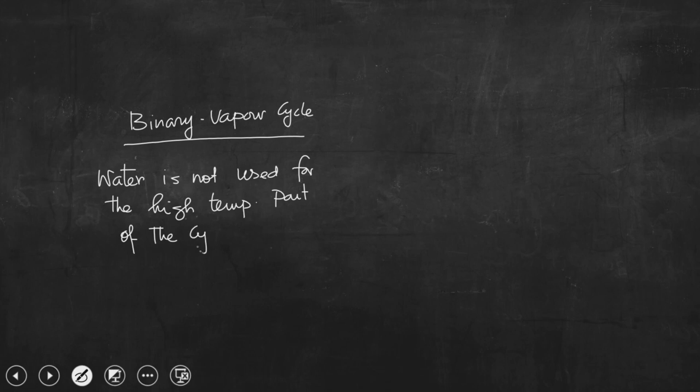Briefly, water is not used for the high temperature part of the cycle. It is replaced by more suitable fluids like mercury, sodium, potassium, etc. This means we cannot reject water completely as the working substance in the steam power cycle; rather, we cannot use water for the high temperature part of the cycle. What we can do is replace it, as you have seen in the last class.

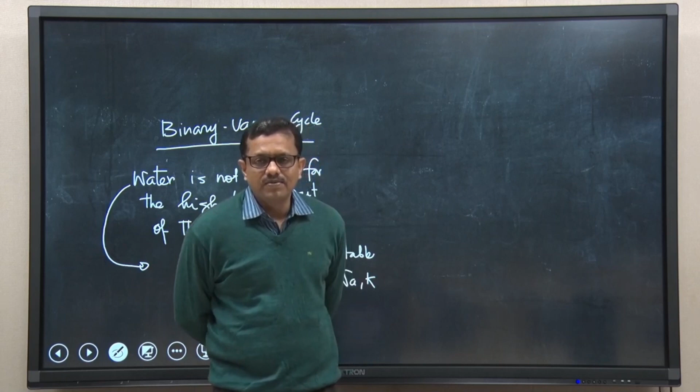The idea is that water will be used again in the low temperature part of the cycle, but for the high temperature part we use either mercury, sodium, or potassium. As discussed, properties like high critical temperature, low triple point temperature, high enthalpy of vaporization, and high heat transfer characteristics - water does not have all these at the high temperature part of the cycle, but the same working substance can be used at the low temperature part. That means different fluids have different attractive features, but not all of them.

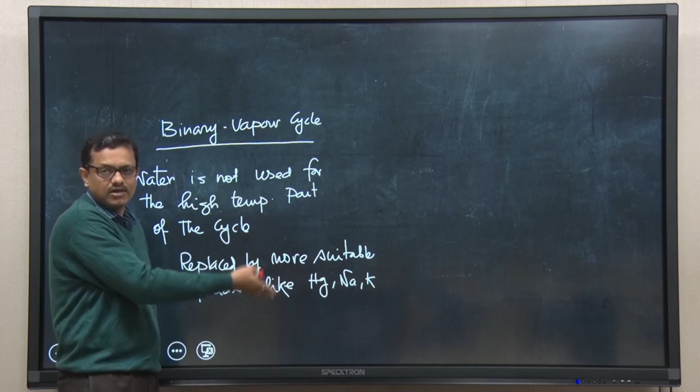Our objective should be to use both fluids, because though these two different fluids have different attractive features, not all of them possess everything. In the high temperature part of the cycle, mercury will have a few attractive features that water will not have. Similarly, at the low temperature part of the cycle, water will have a few attractive features that mercury may not have.

So it is because of this reason that two different vapor cycles operating on two working fluids are combined together, and this concept is called the binary vapor cycle. So the idea is to use a binary vapor cycle.

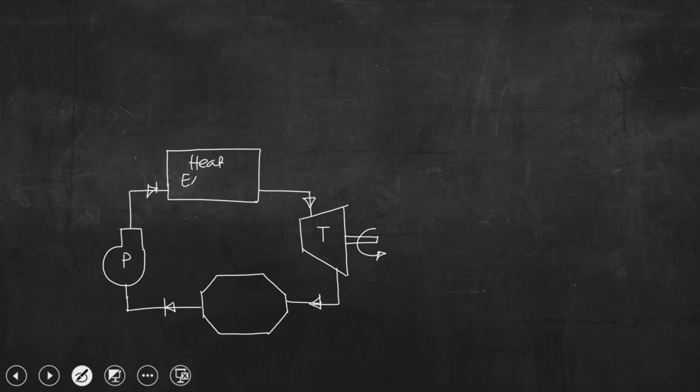If we go to the next slide, let us try to draw the schematic depiction. This is the pump, this is a heat exchanger, this is the turbine, and this is the condenser. Now, you can see, this is the steam water cycle.

So, this is the low temperature part of the cycle, because we are using water as the working substance, as per our previous discussion. And similarly, this is the high temperature part of the cycle.

So, this is the turbine, and this is connected to the electric motor. Mercury turbine connected to motor, so we are giving the name mercury electric motor. The shaft of this turbine is also connected to the shaft of an alternator, and that is the steam alternator, we can give the name.

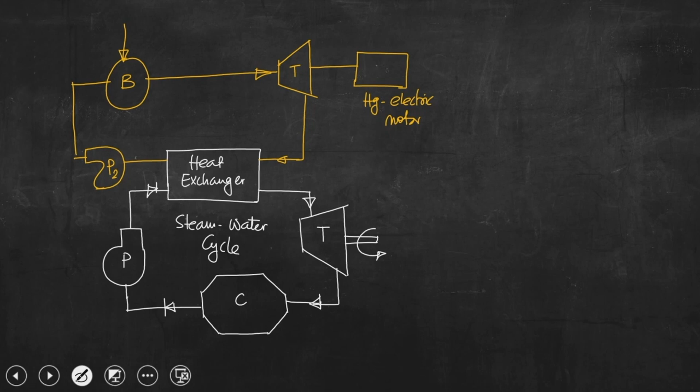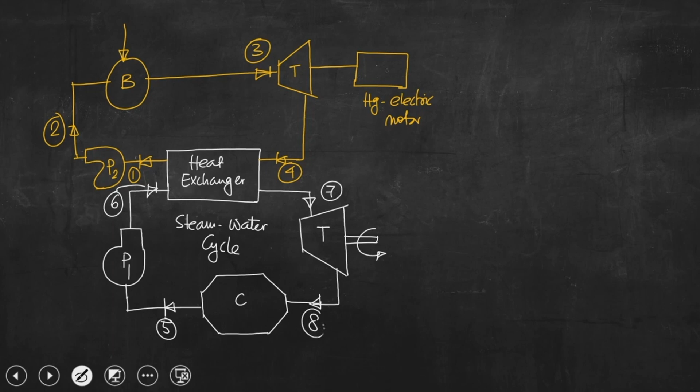Okay, now that is again pumped back to the boiler, which upon receiving heat, so this is the turbine. So, this is 1, this is 2, this is 3, this is 4. We can give the name. Similarly, this is 5, this is pump 1, this point is 6, this is 7, and this is 8. So, this is basically the Hg cycle.

So, you know that this is the binary vapor cycle. The idea was to use both fluids. We are enjoying the attractive features of mercury, which are usable at high temperature. Also, we are exploiting the attractive feature of water at the low temperature part of the cycle. So, this is the high temperature part, and this is the low temperature part.

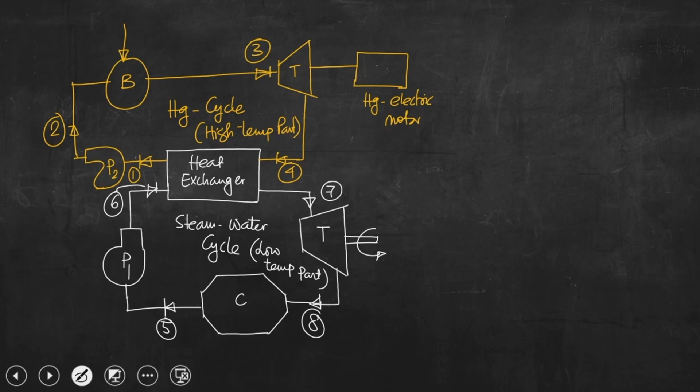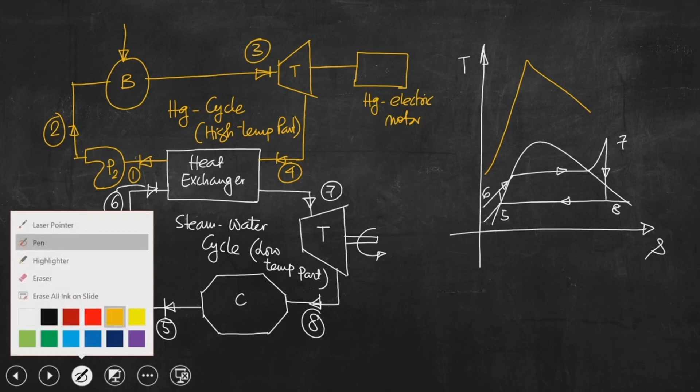Okay, so if we try to draw the TS diagram, so this is 5 to 6, this is 5, this is 6, this is 7, this is 8. And if we try to draw the TS diagram for the high temperature part of the cycle. So, this is the case. Now, this is 1 to 2, the pumping process. So, this is 1, this is 2, this is 3, and this is 4.

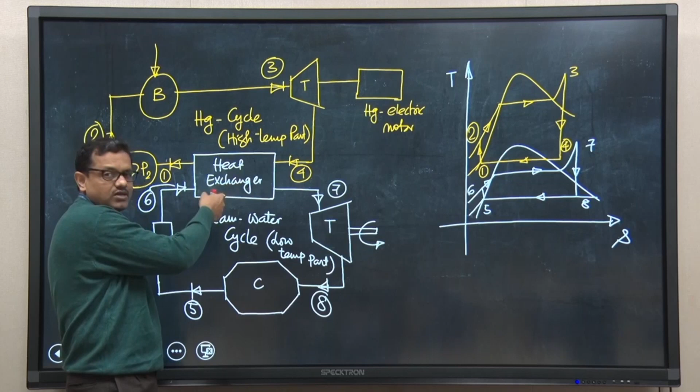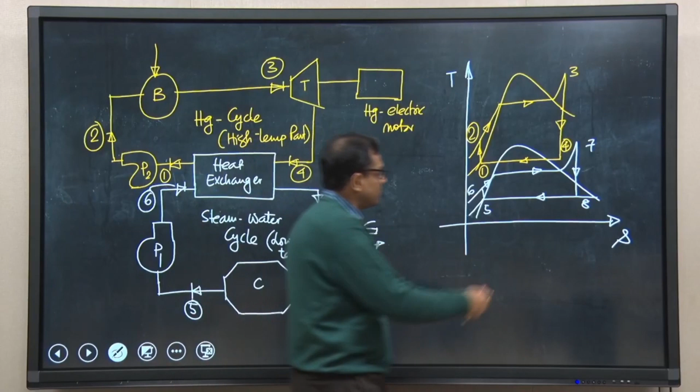So, the heat lost by mercury is equal to the heat gained by the water, and that is how water is converted into steam, and finally it is allowed to expand isentropically in the turbine, and we are getting output. So, the design should be such that the steam coming at the exit of this heat exchanger is superheated, otherwise the problem of turbine blade erosion will occur, which we have discussed extensively when discussing other cycles.

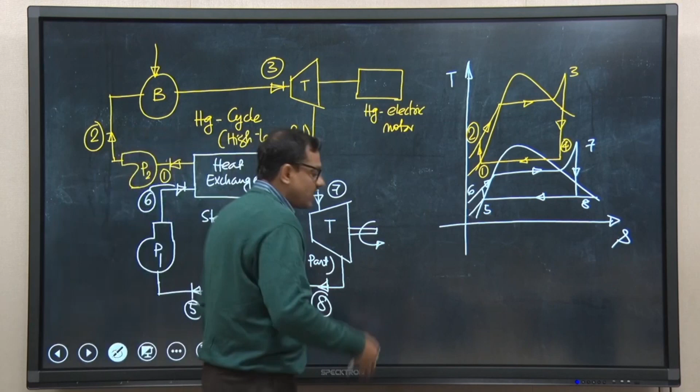So, now let's go for the discussion, and our objective in this class should be to analyze, essentially to calculate the thermal efficiency. So, if we consider that m kg of mercury is circulated per kg of steam generation, this is what we are assuming.

We are assuming that the mercury which is circulated, the mercury which is pumped by pump P2 to the boiler, this is Q in, and finally this is Q out. Virtually there is no heat rejection in the Hg cycle, but there is heat rejection, and that rejected heat is gained by the water. So effectively, there is a high temperature part of the reservoir wherein heat is added, and a low temperature part of the reservoir wherein heat is rejected.

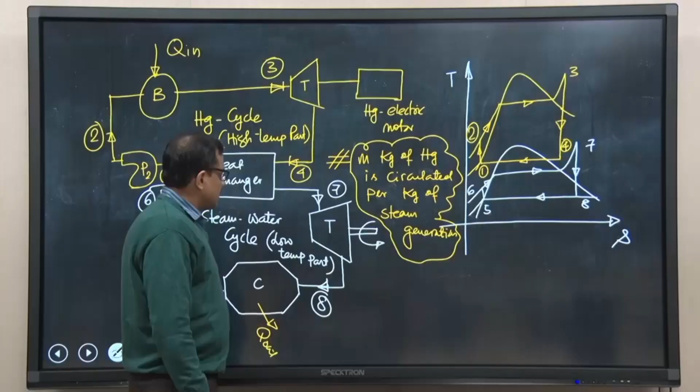So, if we consider the mass of mercury circulated in this cycle is m, that m kg of mercury is circulated, because mercury would be converted to mercury vapor in the boiler, and then it will go into the turbine for its expansion. And if we consider that per kg of steam we need to supply or circulate m kg of mercury, that is what we have assumed.

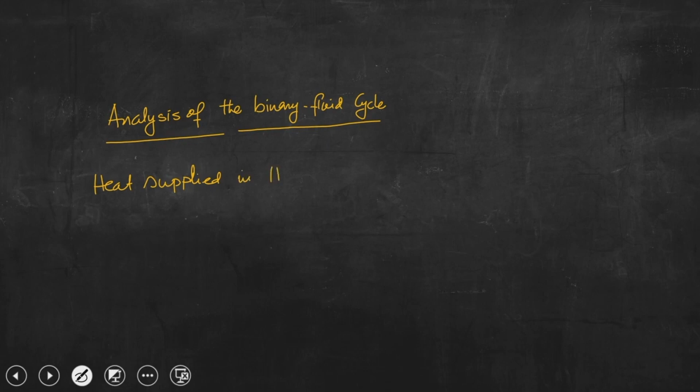Okay, so now let's go for the analysis, the analysis of the binary fluid cycle. So, the heat supplied in the Hg boiler, we are using this prefix Hg to indicate that the boiler is associated with the Hg cycle. So, this is Q in, and that is what we have seen, that this amount of heat is added to this mercury cycle, and Q in is equal to m into H-Hg-in, or I can give the name HGI.

This quantity is basically the amount of heat, this enthalpy, supplied per kg of Hg vapor formed in the boiler. So, if we assume that m kg of mercury vapor is produced in the boiler, then this is the total amount of heat, Q in.

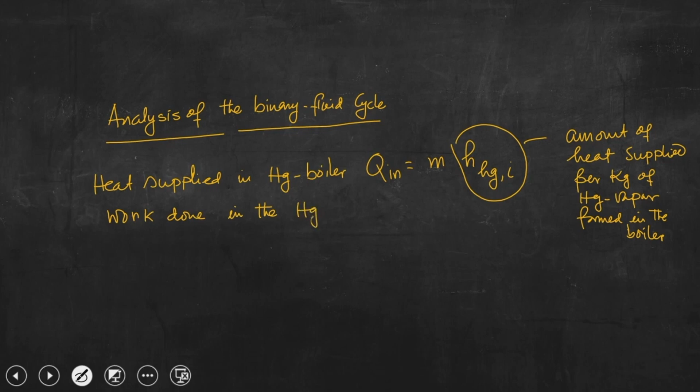And what is work done? Work done in the Hg cycle equal to Whg, equal to mass flow rate into specific work done, Whg. So, this is work done per kg of Hg in the cycle. Right, because we are assuming m kg of Hg. So, this is the total work done.

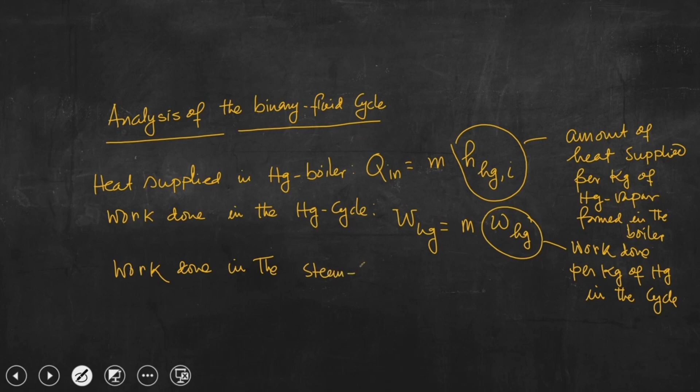Next is what is the work done in the steam cycle? I am not going to write steam water cycle or the steam cycle. So, W steam will be equal to WST into 1, because we have assumed that for 1 kg of steam generation we need to supply m kg of mercury. So, that is 1 into WST, and this WST is work done per kg of steam in the steam cycle.

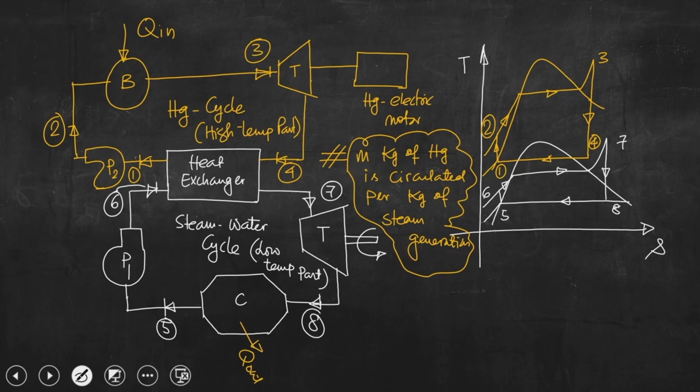So, if we write what is the total work done, let's go back to the previous slide. We are getting work output from the mercury turbine, we are also getting work output from the steam turbine. So, this total work output we need to calculate first, and this total work output we are getting at the cost of this heat input Q in.

So, from there we can calculate the overall efficiency or total efficiency of the cycle. So, we can write total work output equal to W total equal to m into Whg plus Wst.

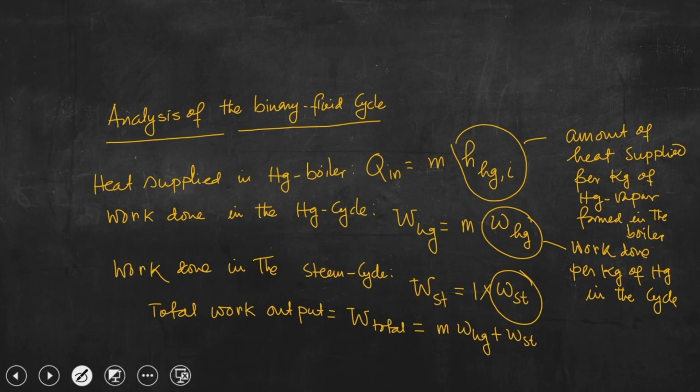So, overall efficiency of the binary cycle, that is eta overall, equal to W total by Q in. So, we can write this is m into... this is because Q in, that is the expression. So, this is the work done for the binary cycle, overall efficiency of the binary cycle.

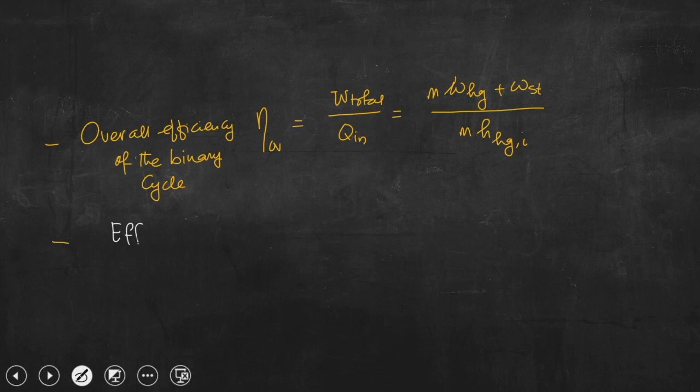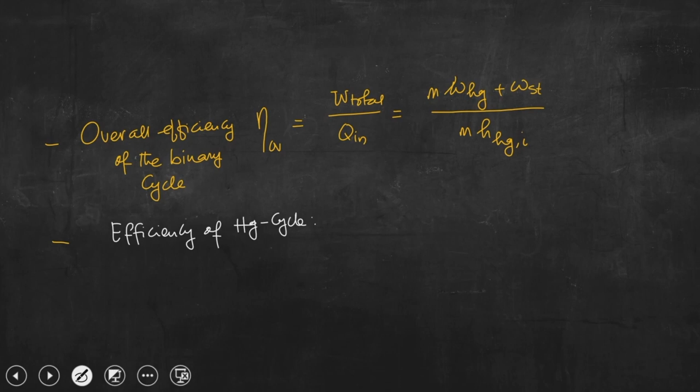We also can calculate efficiency of the mercury cycle. What is that? Eta mercury, because H small g is used to denote that it is mercury. So, what is eta Hg? We are supplying this amount of energy which is added to the cycle, and at the cost of that energy we are getting only this much amount of work, WHG. So, this is the expression.

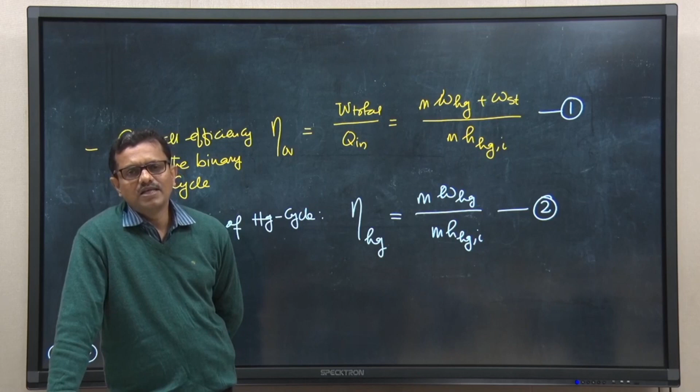So, if we give this equation is 1, this equation is 2. So, we have calculated efficiency of the mercury cycle. Next objective should be, since we are discussing the analysis of the binary fluid cycle, till now we have calculated the overall efficiency as well as the efficiency of the Hg cycle, that is the top cycle, topping cycle.

So, let me go back to the previous slide. This cycle is also known as topping cycle, and this is known as bottoming cycle. So, our next objective should be to look at the processes of the bottoming cycle, and from there we should try to calculate the efficiency or thermal efficiency of this cycle.

So, if we go to the next slide, then that is efficiency of steam cycle. Try to understand, if you would like to calculate efficiency of the steam cycle, we know that what is the work output, right, that is WST, because 1 kg of steam should be generated. So, what is the input energy for that work output?

So, that input energy is coming because in this case there is no heat source which is supplied externally, rather the temperature of the Hg vapor after doing certain amount of work in the Hg turbine, when it is taken through this heat exchanger, you can understand this is just like counter flow heat exchanger. So two streams are flowing opposite to each other, and during the course of their flow, because of this heat exchange, the water which is circulated or pumped to the heat exchanger will be heated up, and it is designed such that at the exit of the heat exchanger it should be superheated steam. So the idea is this heat exchanger is also known as Hg condenser and steam boiler.

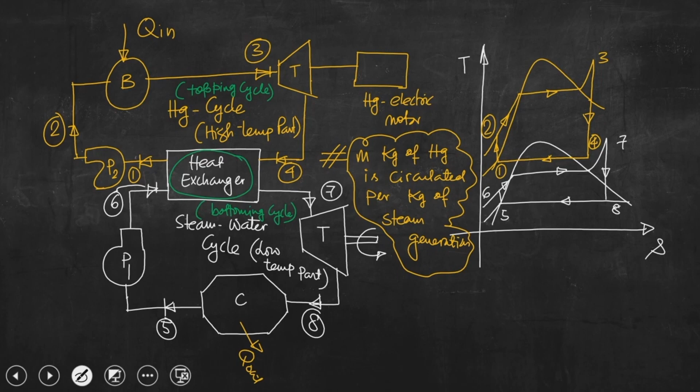So if we write that: heat lost by mercury vapor is equal to heat gain by water. If we do like this, then we can write m kg, and we do not know the enthalpy of water, the enthalpy of HG vapor after doing a certain amount of work. So this is H HG out equal to H ST, because this is 1. From there we can say m is equal to H ST divided by H HG out.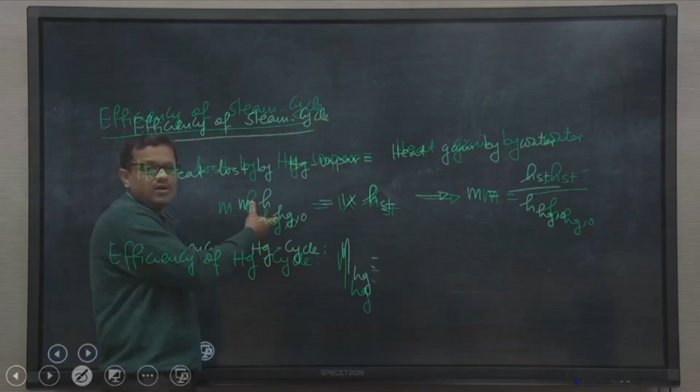So this is the expression. Now the efficiency of the mercury cycle, what we had written, that is eta Hg equal to... knowing that this is the loss of energy by the mercury during the cycle, and that energy should be gained by the water. So can't we write the expression of efficiency from the perspective of energy balance?

So we know that this is the amount of energy in minus out, divided by m Hg,i. So basically this is the amount of energy added to the Hg cycle, but out of this energy we are going to reject some amount of energy to the water. So this is the net energy that is used to get the work, and that is how we get the work output from the mercury turbine. So this is also the expression.

So we can write it. See what is this expression? If we look at this equation, m into Hgo is equal to Hst. Why are we doing this? We can write this equal to m into Hgi minus Hst, divided by m into Hgi. Why are we doing this?

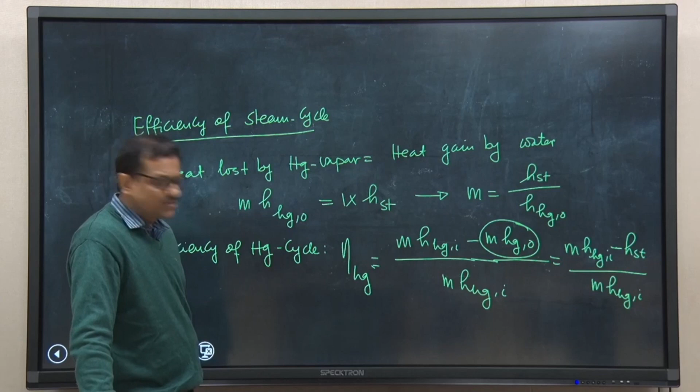Because we are going to calculate the thermal efficiency of the steam cycle soon. For that we need to relate this Hst, because that is the amount of energy added to the steam water cycle per kg of steam generation. So if we go one step further, we can write this equal to 1 minus 1 upon m, Hst divided by Hgi. So this is equation number 3.

If we now use the expression of m, this is equation 3a and this is 3b. So if we use the expression of m from equation 3a and plug it in here, then we can write eta Hg equal to 1 minus...

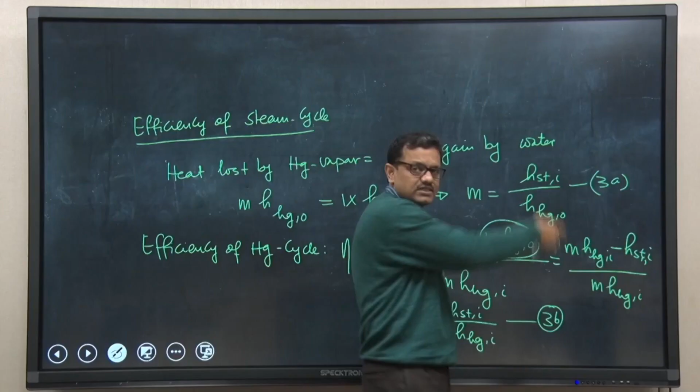What is m? M is Hst by Hgo. So I can say this is Hsti, because that is the inlet value. This is the enthalpy of steam at the inlet to the cycle, right, inlet to the cycle. So basically this Hgo, the enthalpy of mercury out, is equal to the enthalpy of steam at the inlet to the cycle, that is Hsti.

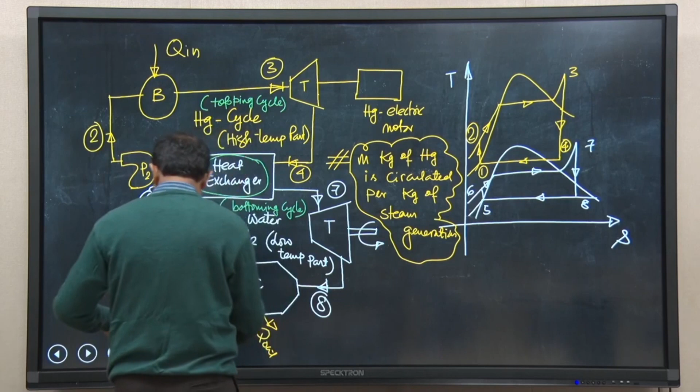That is why I'm using this nomenclature, Sti. So if we plug in the value, we can write this as Hsti by Hgi times Hgi by Hgo. We can go one step further and write this as 1 minus Hgo divided by Hgi. So this is the efficiency of the mercury cycle in terms of the enthalpy that we considered. From there we can write the thermal efficiency of the steam cycle.

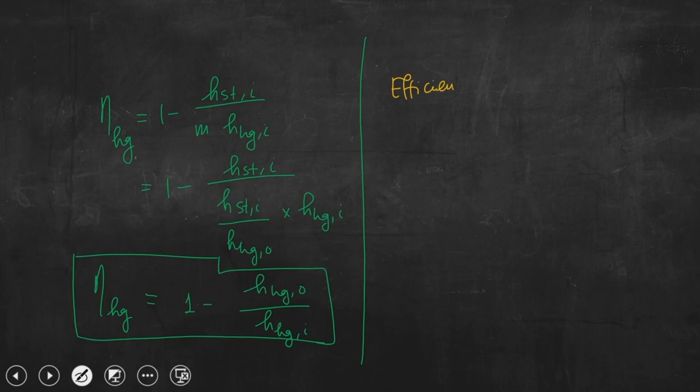Efficiency of the steam cycle, eta St, equal to... what is this? Try to understand. This is Hsti, so per kg of steam this is the input energy to the cycle, and at the cost of that we are getting work output, that is Wst. So this is the efficiency that you can understand very easily: work output by heat input, energy output by energy input.

So this is the amount of energy added to the steam cycle per kg of steam, and we are getting total work output, that is 1 into Wst. So we can write Wst divided by Hsti. What is Hsti? Try to understand.

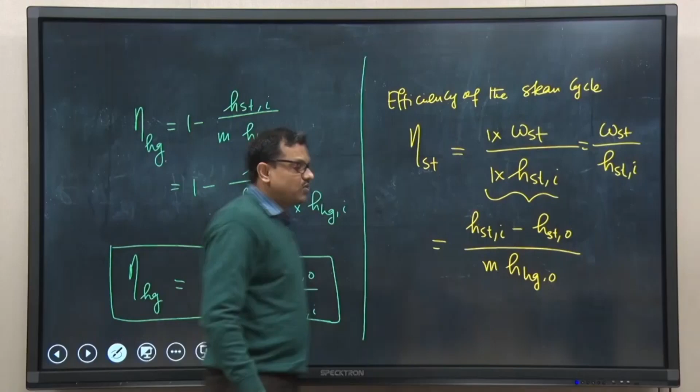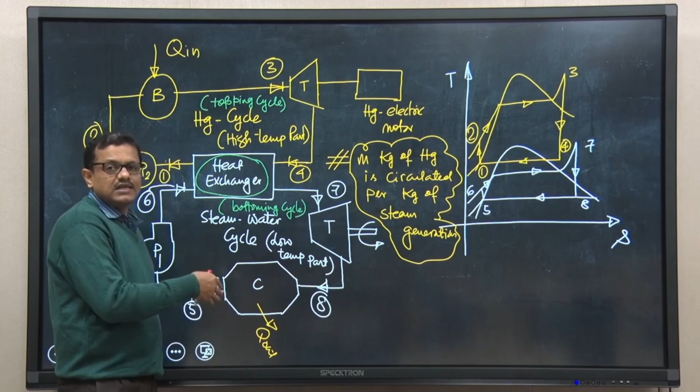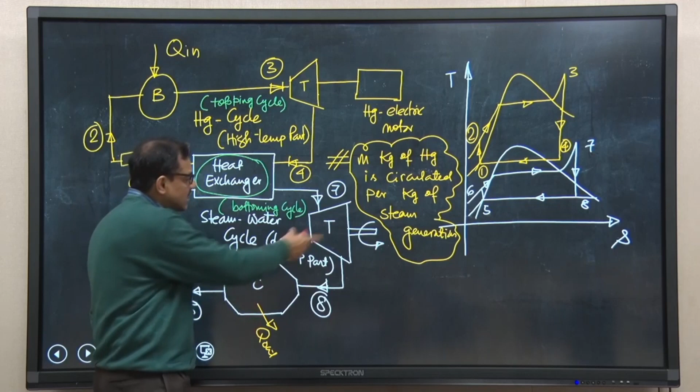HSTI equals m into HHGO. So we are trying to express this as m into HHGO, and then HSTI minus HSTO, because if we look at the steam cycle, HSTI is the enthalpy per kg of steam entering the cycle, but there is heat rejection. So per kg of steam, the amount of heat that must be rejected from the cycle, because we need to run it in a cyclic manner. So Q out is nothing but HSTO per kg of steam, and enthalpy in minus enthalpy out gives us WST.

So if we write it, this is the efficiency of the steam cycle, and this is the WST. So next, our objective should be, if you recall, we could quantify the efficiency of the binary vapor cycle, and we also established the efficiency of the mercury cycle.

Finally we have established the efficiency of the steam cycle. So our objective should be to see the contribution, what fraction of steam cycle efficiency is contributing to the total efficiency of the cycle. If you would like to do it, we need further calculation. So if we try to write the overall efficiency, we need to know the contribution coming from both the mercury cycle and the steam cycle toward the overall efficiency. Is it 60-40, 50-50, or is it 30-70?

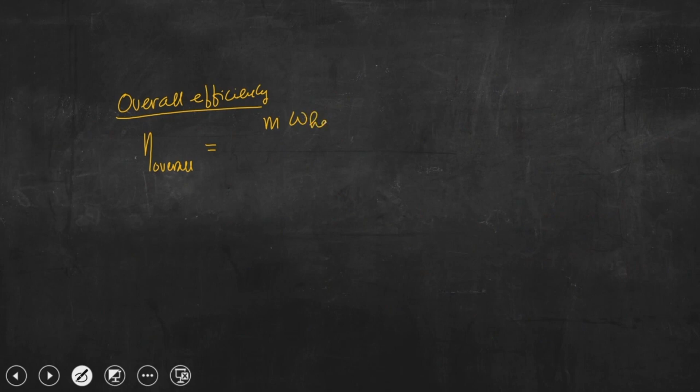So overall efficiency, eta overall, what we had written, if we go back to the previous slide, is the expression m, WHG plus WST, by this. So if we write it, that is m WHG plus WST divided by m.

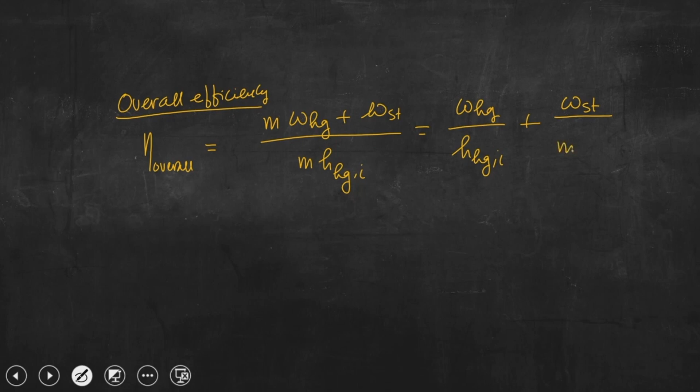That is the enthalpy of mercury at the inlet. So we can write it as WHG divided by HHG comma I, plus WST divided by m, Hg comma I. What is this? Try to understand, this is the efficiency of the mercury cycle, because this is the input energy and this is the output work. So this is basically the mercury cycle efficiency.

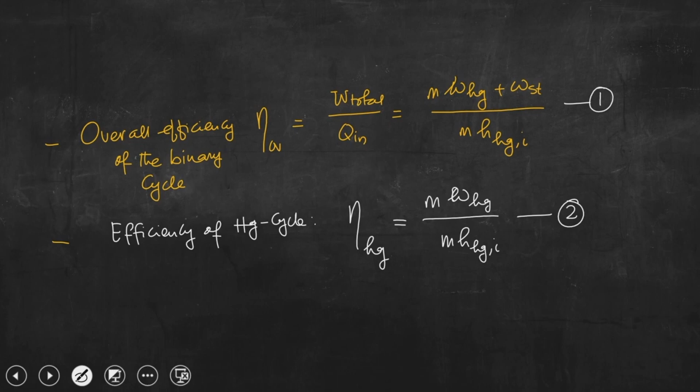So if we go back to this, you can understand that the mercury cycle efficiency is nothing but equation 2, m into WHG by m into HGI. If you cancel m from both denominator and numerator, you get WHG by HGI. So if we go to the next slide, this is eta Hg, the efficiency of the mercury cycle.

What about this term? We can try to write it as WST divided by HSTI. Okay, so HSTI we can write as into HSTI divided by m, HHGI. Why are we doing so?

Because this is the work output for the input of energy to the steam cycle, so this is the efficiency of the steam cycle, that is what we had written. Let us go back to that: this is WST by HSTI. So to give this expression in the form of steam cycle efficiency and mercury cycle efficiency, we are doing this.

What about this m? We can write that eta overall equals eta Hg plus eta St into H St comma I divided by m Hg comma I. Even though it is not in complete closed form, from here we still cannot say what the contribution from the steam cycle toward the overall efficiency would be. So it's not in closed form; rather, we need to write this expression in terms of the efficiencies of either the steam cycle or the mercury cycle.

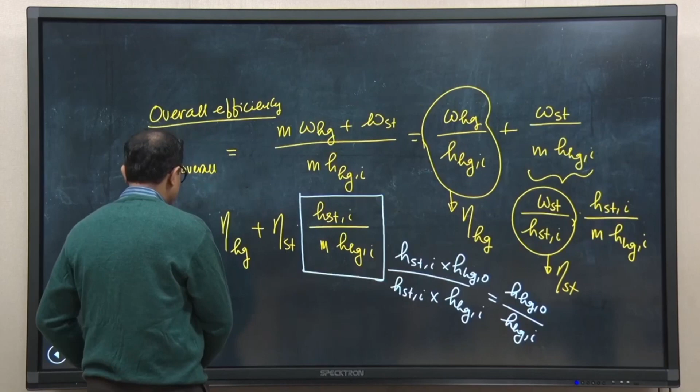Can you recall? Now we can write this expression in terms of the efficiencies, or at least in terms of efficiency. What we can see, a few minutes back we calculated this mathematical exercise, so we can see the expression of H Hgo by H Hgi is nothing but 1 minus eta Hg. So if we write it, we get eta Hg plus eta St into 1 minus eta Hg. So this is eta overall.

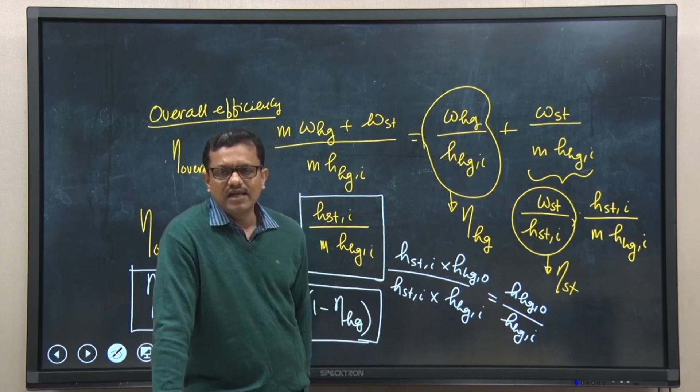So this is the final expression of the overall efficiency of the binary cycle, now in closed form. By looking at this expression, we can tell the contribution coming from both the Mercury and steam cycle towards the overall efficiency of the binary cycle. So this is basically the analysis part of this binary cycle, and it is very easy, just the things we have discussed from our basic concept.

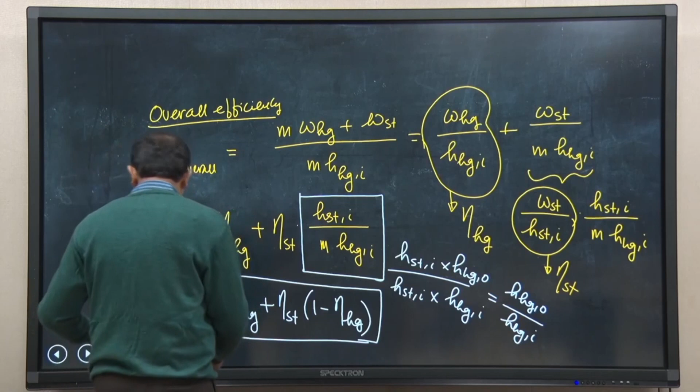So now finally, I would like to discuss about the second law analysis. So this is very important, that is second law analysis.

You have studied about the second law of thermodynamics in the context of basic thermodynamics course, but now the question is why do we need to again discuss this particular aspect in the context of the module of steam power cycle. So we have discussed starting from the Carnot cycle to ideal Rankine cycle, then Rankine cycle with different modifications, reheat Rankine cycle, regenerative Rankine cycle, and finally binary vapor cycle.

So out of these cycles, only the Carnot cycle is the reversible cycle. In the Carnot cycle, if we try to recall, all processes are two reversible isothermal processes and two reversible adiabatic processes. So already I had mentioned reversible - all processes are reversible, both internally as well as externally.

So long as the processes are reversible, whether internal or external, basically these processes are both internally and externally reversible, there is no need of studying this particular topic. So basically, second law is important, is vital to understand the degree of irreversibility present in any processes.

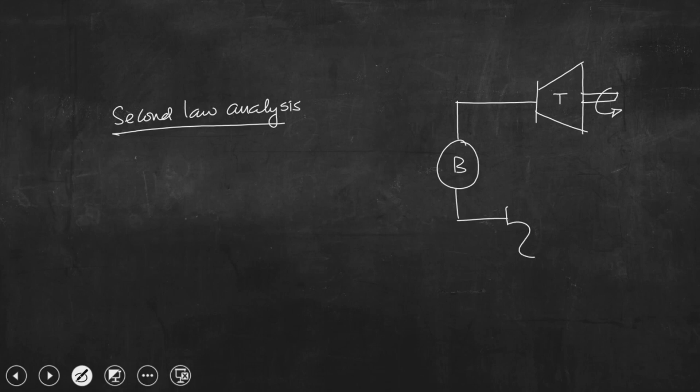So this is the boiler, this is the turbine, this is the pump, this is the condenser. So these are the basic components.

What we can see is that even if we consider the simple Rankine cycle or simple reheat cycle, reheat Rankine cycle, or even regenerative cycles - for the regenerative cycles we need additional components, even for the reheat cycle - but if we consider the simple ideal Rankine cycle, what we can see is the schematic used to describe the processes in the simple ideal Rankine cycle.

What we can see is all the processes are internally reversible, right? But what is done here: heat is added from a high temperature thermal reservoir to the boiling liquid. So addition of heat from the high temperature thermal reservoir to the boiling liquid, and finally, if we look at this component, heat is rejected from the condensing steam to the low temperature reservoir.

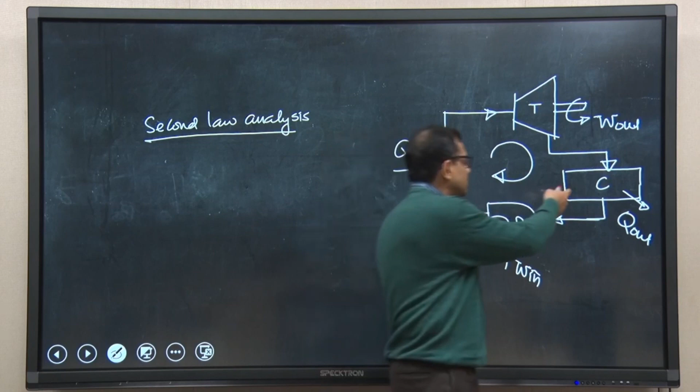It is because of this irreversibility, whether during heat addition to the boiler or during heat rejection from the condenser, some degree of irreversibility will be there, and so long as irreversibility is present in any process, it will tend to destroy the available energy. So this cycle has the potential to do some work, but that potential will be destroyed because of the irreversibilities present in these two processes. It is because of this reason we also need to study this second law analysis.

Second law analysis will give us a picture about the presence of the irreversibilities, the sources of irreversibilities, as well as it will help us measure the degree of irreversibility present in any process. Let us quickly do it.

That exergy destruction term you have studied in thermodynamics - what do we mean by that? That is resource degradation. Exergy destruction is nothing but the resource degradation.

These two processes, like heat transfer from high temperature thermal reservoir to the boiling liquid, and heat rejection from condensing steam to the low temperature thermal reservoir - these two processes will destroy the energy at which this cycle will work.

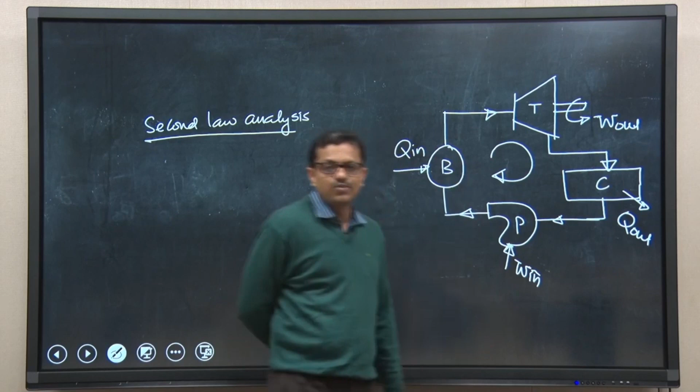If we could somehow remove these two processes, if we could ensure that heat is added to the boiler without inviting any irreversibility, and that heat must be rejected from the system to the surroundings without inviting any thermodynamic irreversibility, perhaps the efficiency of the cycle would be better compared to the case where these two processes invite irreversibility - and that is the real process.

So these two processes are not allowing the system to operate at the best exergetic efficiency. Exergetic efficiency will be destroyed only because of the irreversibility present. So this exergy destruction is the measure of the deviation of the exergetic efficiency of any particular system.

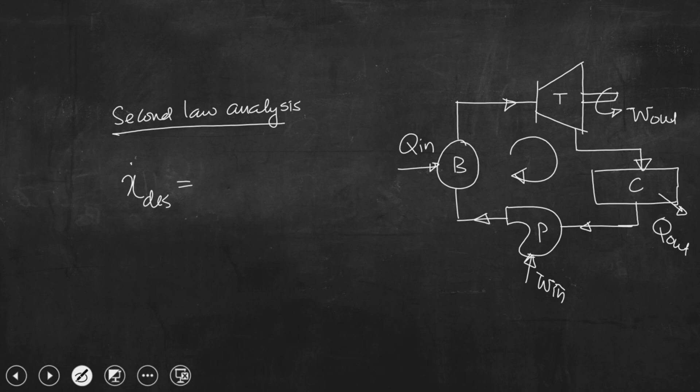So exergy destruction, X destruction dot, is nothing but T naught into S dot gen. This is the entropy generation.

Basically these two processes will lead to the generation of entropy, and it is because of this entropy generation there will be resource degradation - that is, the available energy would be degraded, and as a result exergetic efficiency will be reduced. This is the equation, probably you have studied in thermodynamics, I am not going to derive it.

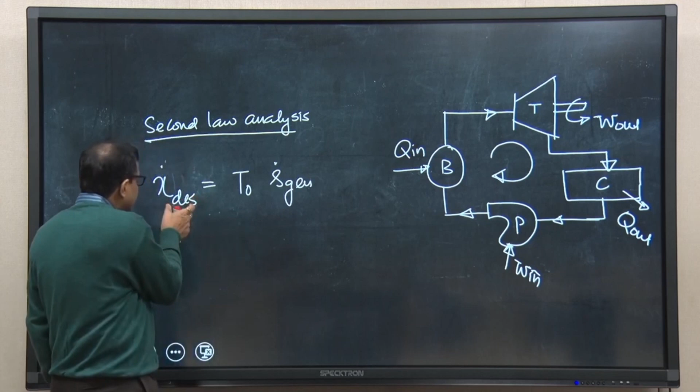So this is the expression of exergy destruction for a steady flow system. Let me discuss one particular case.

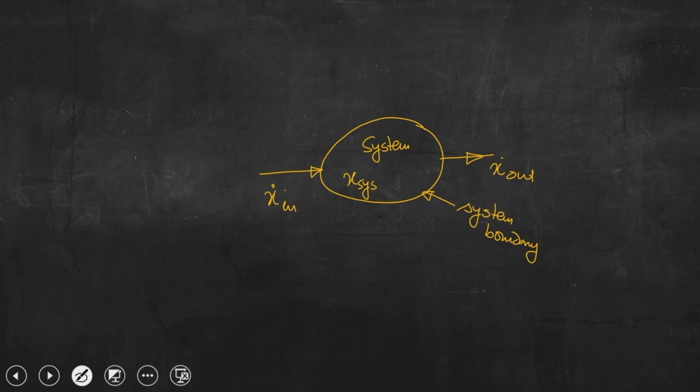Say if we consider one system, and this is the system boundary - this is exergy in, this is exergy out, and this is basically the system. The system will be having exergy of the system plus exergy destruction.

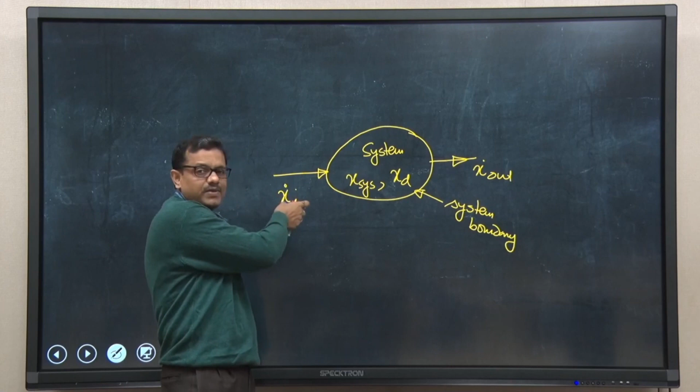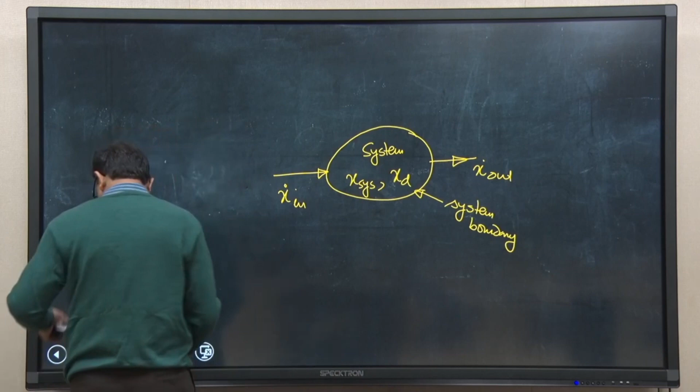So if this is the expression of exergy into the system, and this is the expression of exergy out from the system, then we can write: exergy in equals change in exergy of the system plus exergy out plus exergy destruction.

You can understand this: exergy in, which is added to the system, will change the exergy of the system - there will be some amount of exergy destruction plus some amount of exergy that will come out from the system. If we have multiple inlets to the system and multiple exits from the system, no matter what, some amount of exergy destruction will be there, and this exergy destruction will be zero if the process is reversible.

But it is greater than zero for irreversible processes - for all irreversible processes this exergy destruction is greater than or equal to zero. So if we try to write it now, this is the expression in the context of the steam power cycle, that is our focus today. So basically we can write that X dot destruction.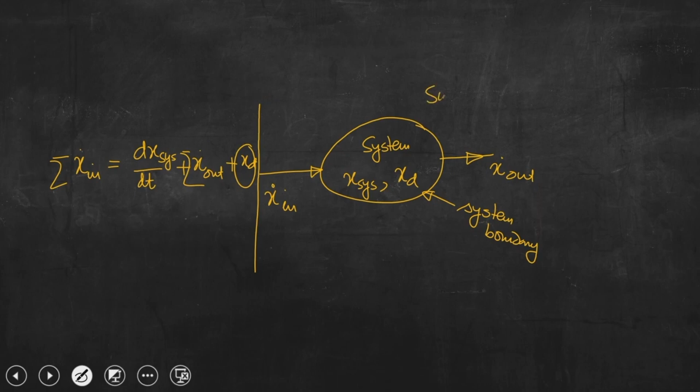X dot destruction is equal to T naught S dot gen. This T naught is the reference temperature - let me write it. This is surroundings, and this refers to reference.

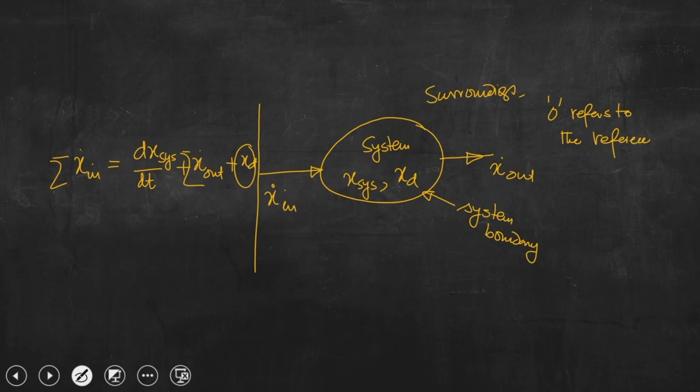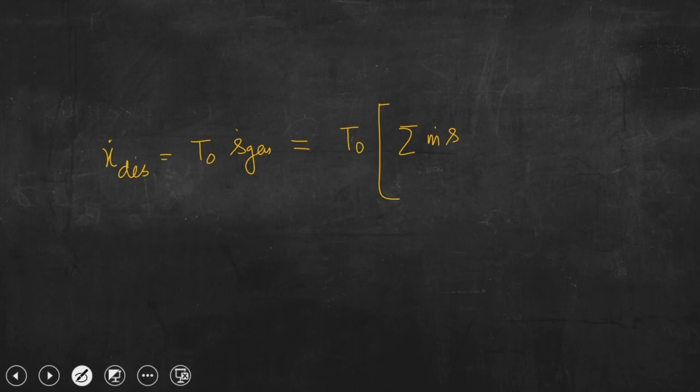So what can we write? This is for the steady flow system in the context of steam power cycles. Say if we consider a simple ideal Rankine cycle - T naught times m dot S out plus q dot out by T boundary out, minus m dot S in plus q dot in by T boundary in. So this is the expression.

So you know this is exergy in plus - let me write it. So this is basically what we are writing: T naught into S dot out minus S dot in. This is for the steady state, steady flow processes.

System - rather I will write system, not process. So this is for a system. If we consider that we have single inlet, single exit, and per unit mass flow, mass of the working substance.

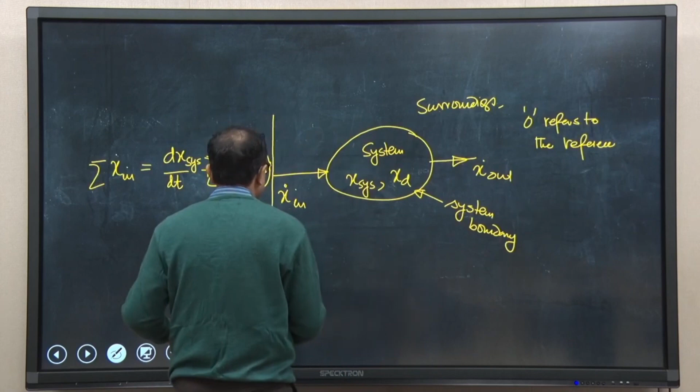you can write it even for all the individual components, but if you would like to write this for the cycle, then it can be written as exergy destruction equals T naught into Q exit by T boundary exit minus Q in by T boundary in. So this is the surrounding state.

Surrounding state. So now basically, if you would like to discuss what we have written, this is for the cycle. This expression you can apply for all the components which are there in the cycle. What we can see from the final expression - this is the final expression, I am making a box over here.

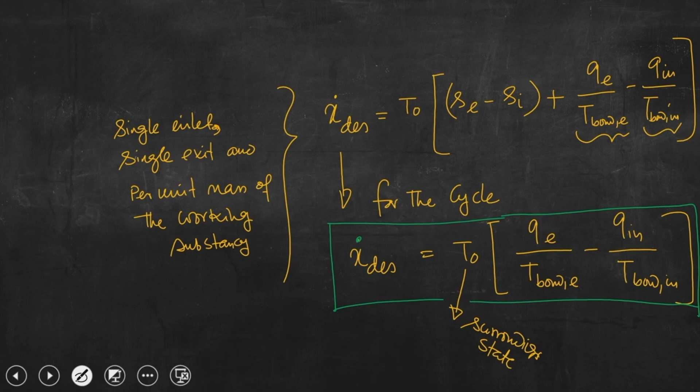So this is X dot. What we can see from this expression, pertaining to this cycle, all the processes are getting executed in a cyclic manner. Some amount of irreversibility is there, and that irreversibility will destroy the exergetic efficiency. What are the sources of this irreversibility? One is heat rejection, that is Q exit, and another is Q in.

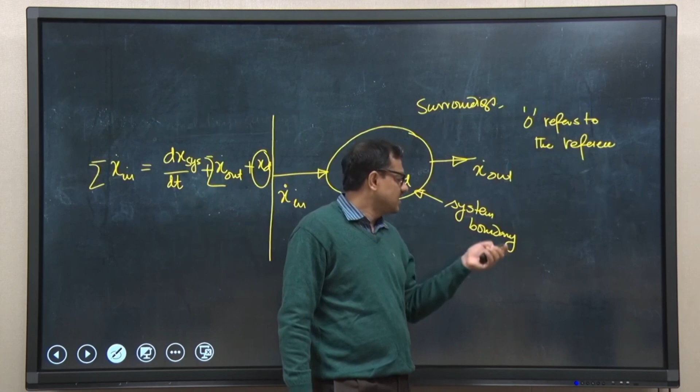So basically, if we can figure out the sources of irreversibility, then we also can calculate the degree of irreversibility that is present. So pertaining to this cycle, as I told you in the beginning, although all the processes are internally reversible, the only problem is addition of heat from the high temperature thermal reservoir to the boiling liquid, that is this fellow, and rejection of heat from condensing steam to the low temperature reservoir, that is this fellow. So these two factors are responsible for inviting some degree of irreversibility, which in turn will reduce the system performance by destroying the exergetic efficiency.

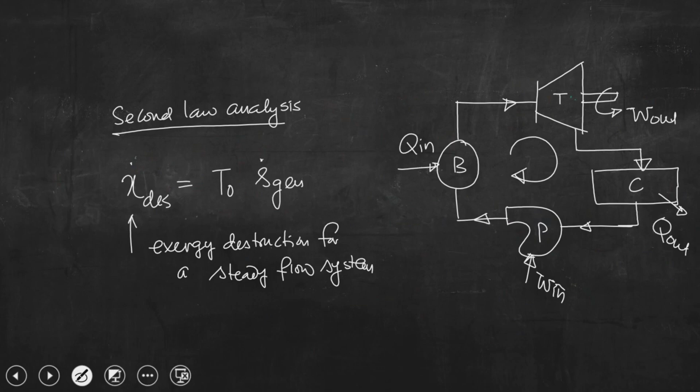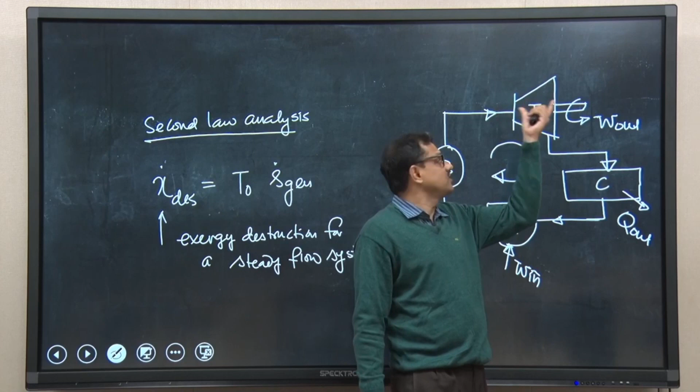If you apply this equation - rather, if I go to the previous slide - if you supply certain amount of heat to be rejected from the turbine, even some degree of irreversibility will be there. In practice, in real application, that is there, but we are allowing the turbine surface to be insulated, so that loss of energy from the turbine, from the flowing steam to the surroundings, is neglected. So you can understand, if we apply this equation even for the turbine and the pump, these two terms are zero, because there is no heat interaction between system and surroundings.

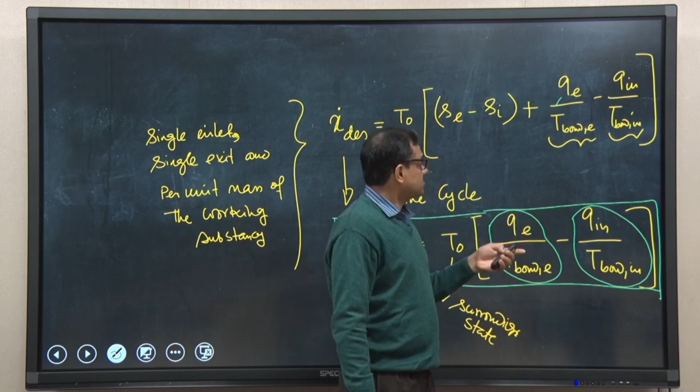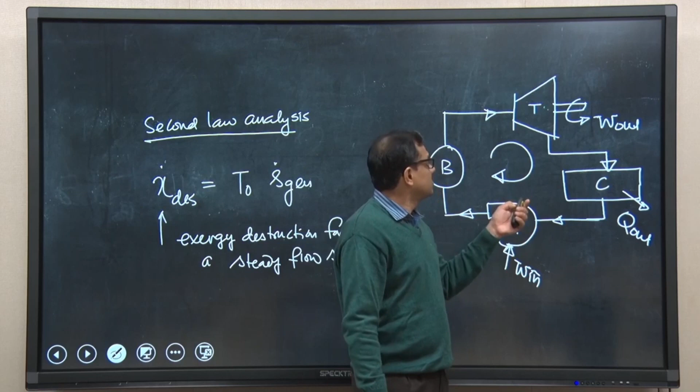So this is applied for any module in the steam power cycle, but there is also S exit minus S inlet. Basically, when steam is entering into the turbine and steam is leaving, there is entropy transport associated with the flow of steam and entropy associated with the heat rejection. So long as the process is cyclic, the contribution from this term will not be there, and that is how we could write the expression of exergy destruction for the cycle.

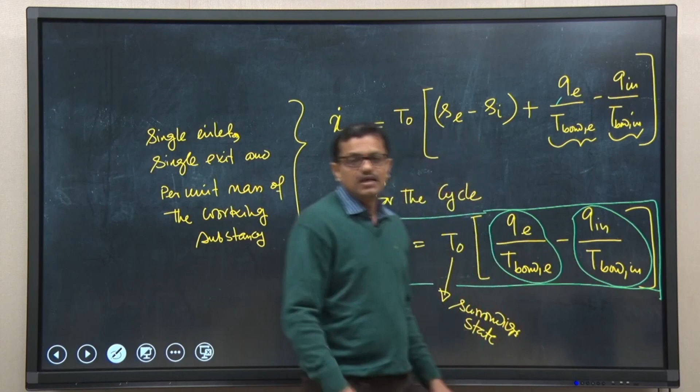And having established this expression, we also could identify the sources of irreversibility in the context of the steam power cycle, which is the heat addition to the boiler and heat rejection from the condenser.